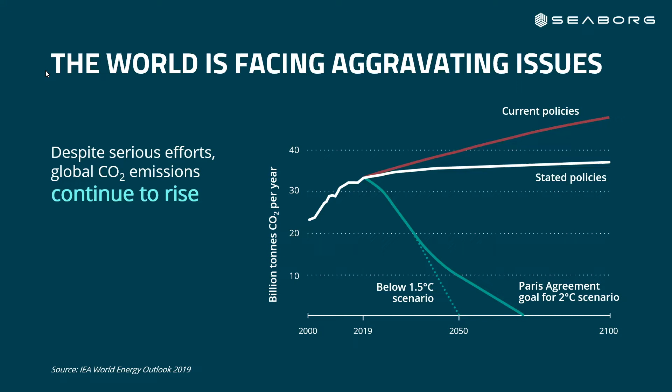So where are we going to solve this problem is the key question. Of course, we want to solve this carbon emission problem across the globe. But our first case here is that we want to take on the Southeast Asian challenge, because carbon emission is historically linked with socioeconomic development, the ways people live. And a lot of economic development happens in Southeast Asia. This region is a rapidly growing economy, but they don't have the climate or the geography to suit the deployment of wind and solar power. And they also have very limited geothermal and hydropower development.

So they want to develop, they want energy. What do they do? They start building a lot of coal power plants. They have around 300 plants to build in the coming decades. And it's really not a very good outlook for the climate. However, they also have a huge population density. If you combine all the Southeast Asian population, it's around 700 million. So it's a considerable problem to give them clean energy and affordable energy, because it's a rapidly growing economy. And that's what we want to solve.

So our vision is to transform the energy markets by deploying clean and cheap energy technologies. And it's not a straightforward task, because most of the time we talk about clean energy in the West, but cheap energy in the East. However, we need both: clean energy for the climate and cheap energy for sustaining the growing economy. Our main mission is to deploy clean energy technologies at a rapid scale, using conventional proven technologies for commissioning and manufacturing, so that it will reduce the cost eventually. Like Vincent suggested before, that's how you achieve economies of scale, because when you deploy a product rapidly, the cost of construction and manufacturing goes down. So that's one of our major goals.

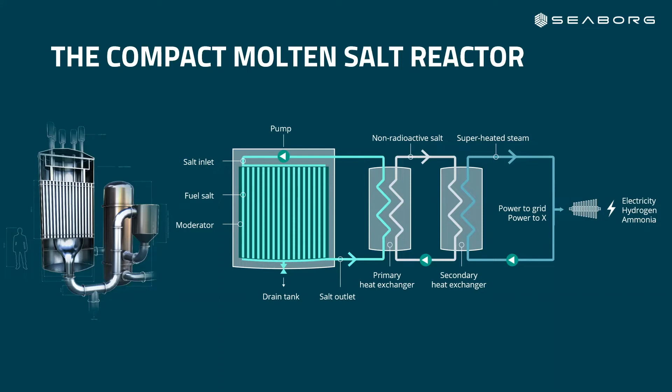So that's the major core, that from a nuclear standpoint, we are using a new type of fuel. And there is a little caveat here, because I will not say anything about the moderator for now, because that's where our real IP lies. And that's what will also explain the compactness. But with that said, this is one CMSR setup. From now on, I will just address compact molten salt reactor as CMSR. And how does this fit in an offshore maritime vessel?

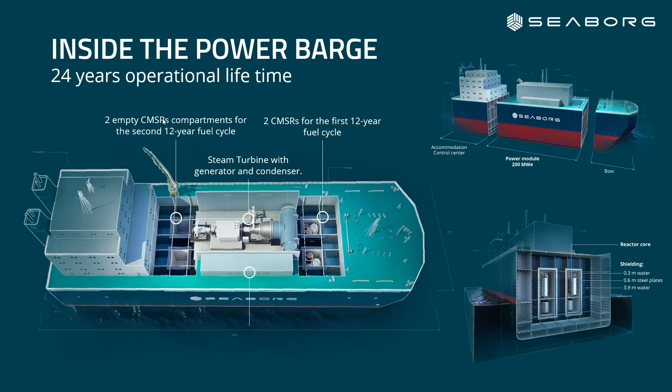So as you can see here, each module can supply up to 200 megawatt electrical. So what is the scale-up ratio here? Our aim is to have this modularized design, so we can deploy up to 4 modules in one batch at a given point of time. So 4 modules, 200 each, maximum 800 megawatt electrical output. And since these are floating and you can tow them, you can construct and manufacture them at a shipyard and deploy them wherever you want.

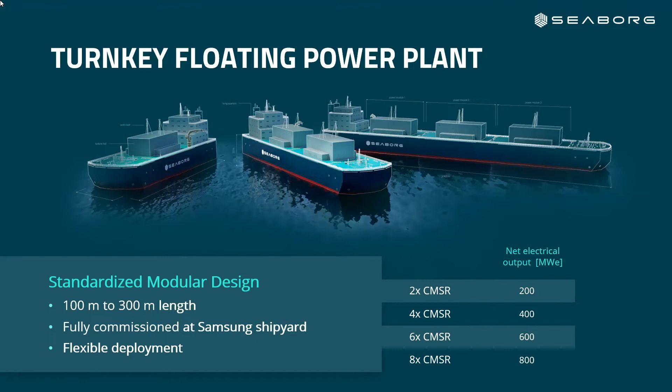And thus you have flexible deployment based on which market you're addressing and where the client wants you to put your power barge. Flexible deployment also helps us during decommissioning, because we can tow it back to a decommissioning facility where we can have centralized decommissioning and waste management at a separate place from where the barge was operating. And it's a very big game changer in terms of site rehabilitation in nuclear.

So, talking about game changers, what are we trying to achieve here? We are not using the conventional nuclear fuel. We are using liquid fuel. That in itself is putting us into an advanced reactor spectrum, where we have to demonstrate a lot of things from the safety point of view, but at the same time from the supply chain point of view.

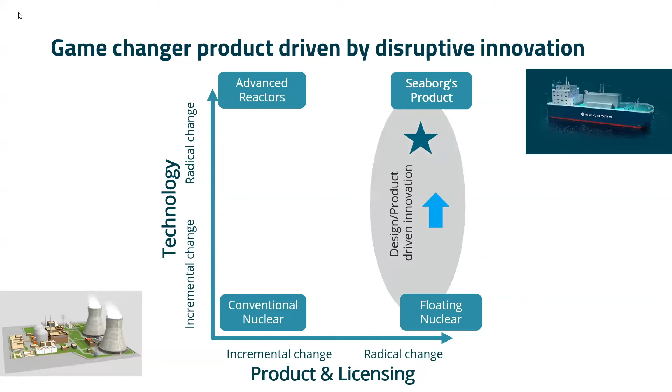There are a lot of other projects from Russia, or even from Turkey, and other players, I think also Core Power from the UK, who are focusing on floating nuclear reactors, and it requires a different licensing strategy, different thinking from a licensing perspective, because you're not just going to deal with the national nuclear regulators, but also with the International Maritime Organization.

So in that sense, we are already doing immense work in having good stakeholder engagement, both from maritime, and we are currently involved with a lot of regulators to see how we can fit it. That's how we want to deliver the product, because a proper standardized licensing enables mass deployment. Not just having technology to mass deploy will help us, but we should have the license to operate it, the license to manufacture it. And that's where these parts come in.

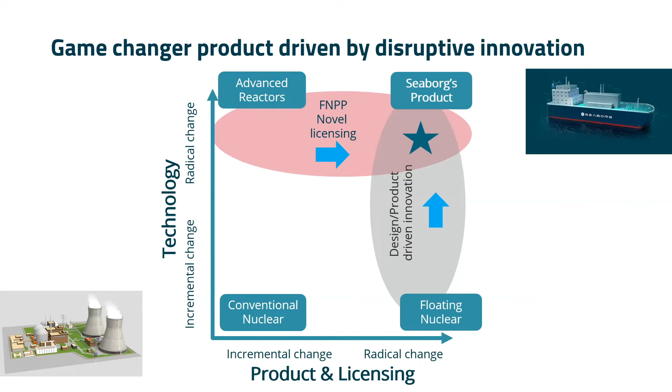So now going back a little bit into science, and this is where I will also talk about the moderator part, where we have the IP. First, why are we using molten salt reactors? Because these reactors can operate at much lower pressure, close to atmospheric pressure. So you don't need big containments similar to conventional nuclear, but more than that, the salt itself can retain radionuclides. A lot of experiments and research are going in to validate and verify these claims, but that's what they explored back in the 60s.

And when I say retain radionuclides, imagine if there is a severe accident and the salt spills out to the land, what will happen? It will just freeze out there. It will not emit any gas. So technically you can just go and clean it up. Of course, you would need some personal protection shielding, but it's not going to contaminate the entire space because all the radionuclides are going to be retained in the salt matrix.

The second one is that molten salt reactors enable us to operate for a longer lifetime. It reduces our refueling timelines, which increases the availability and capacity factor with which we can supply power. And our other goal is to use the molten salts to have flexible reprocessing so that we can reuse the uranium from spent nuclear fuel far more effectively in our future CMSR power projects.

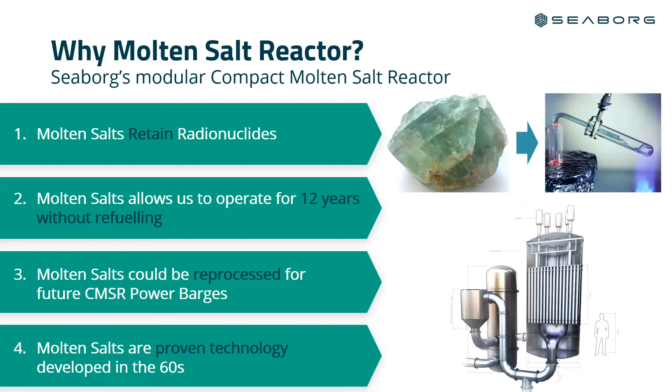And finally, of course, we can't start from zero, because molten salt reactors have already been experimented with and researched in the 1960s at Oak Ridge National Lab. So we take them as an inspiration, but we don't copy them completely. That's where our moderator comes in. The issue with the moderator: we want to operate molten salt reactors for a longer lifetime.

However, the experiences from the MSRE experiments show that they normally use graphite as a moderator in molten salts, because you cannot use water like conventional nuclear, since water reacts so badly with high temperature salt and it's unpredictable. What happened is that graphite expands and contracts because of radiation, and it also degrades over time due to some chemical properties. So you would have a much shorter lifetime, around 6 to 7 years.

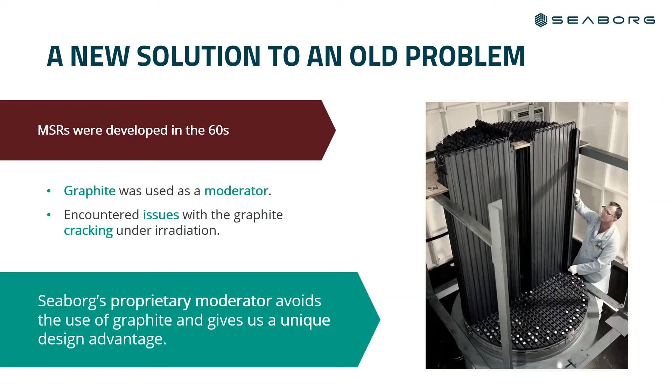To avoid that, Seaborg researched multiple other options from a neutronics perspective and thermohydraulics perspective, and they figured out they want to use sodium hydroxide. That's where our core IP is, and we are going to use sodium hydroxide. It's just a common salt. We can't even call it a salt. It will look like pellets, which people normally use in day-to-day life. However, it is very highly corrosive. It has excellent neutronic properties.

And that's why we can have a very, very compact core, where we get the terminology compact molten salt reactor. So the core itself gets compacted because sodium hydroxide has excellent neutron moderation properties. However, it's super corrosive. And until that point of time, there hasn't been a lot of people looking into sodium hydroxide, especially using it at high temperature. So we were the ones, we thought, okay, neutronics is good. Let's think about chemistry.

We didn't have much data, so we need to deploy a lot of R&D to figure out whether it's possible. And in Seaborg, we have a culture where we like to kill ideas. You have a lot of ideas and you try to kill that idea. And if you can't kill that idea, that's where you have to go. And that's how sodium hydroxide is still prevailing, because a lot of thought process went into killing it, but eventually we couldn't kill it, and we found a way to control it and mitigate corrosion. And that's one of the main reasons why we can also have a longer lifetime, up to 12 years.

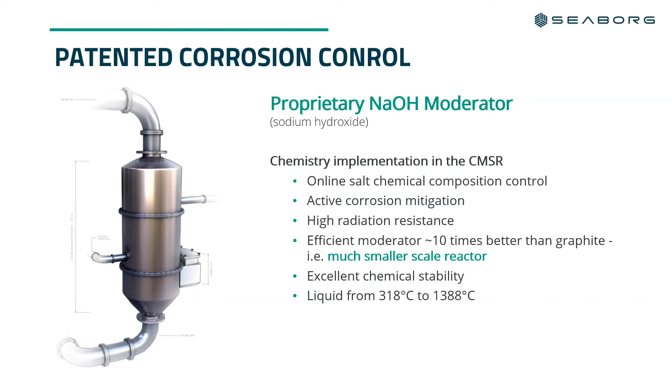So going back into some timelines, I have talked about there's a need for changing the licensing approach, and we are working with stakeholders. So currently, we still proceed with ABS, the American Bureau of Shipping, and the new technology qualification process, where we finished the feasibility. So by the end of this year, we'll be submitting a lot of documentation for the concept and verification stage, and you'll get some good news next year on us going through the upcoming phases.

At the same time, we'll also engage with nuclear regulators to see how we can align the IMO standards for maritime and nuclear regulatory standards. And the timeline going forward is that we want to deploy the first reactor between 2026 and 2028 and supply power; not just manufacturing and commissioning, but also supplying power is quite important. And then by 2028 to 2030, we want to get something called a type approval.

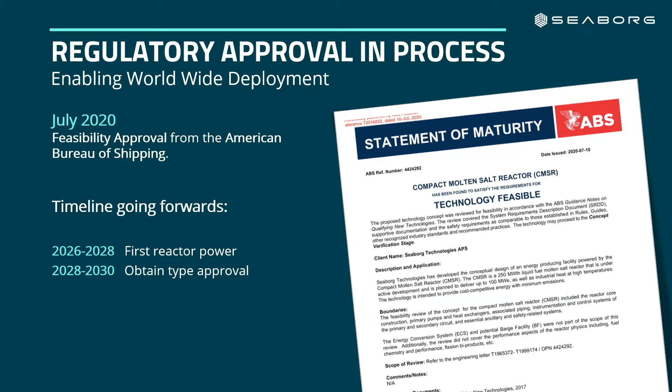Type approval in maritime means that you don't have to get approval for each and every single vessel you are manufacturing at the shipyard. So if the CMSR power barge gets a type approval, you can go and mass produce, and you don't have to go through the entire licensing process from top to bottom every single time you're manufacturing and commissioning your nuclear reactor. So that's a very important step for us in the right direction, and IMO actually helps us to achieve it. But we also have to do this in line with nuclear regulators.

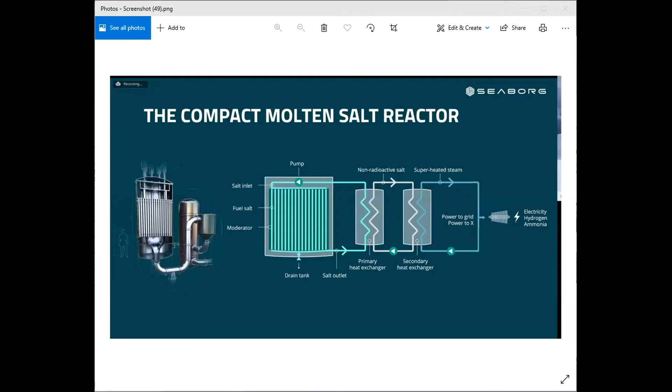Awesome. I had a question, Hannah here. Yes, Hannah. I've seen a floating nuclear power plant, I think at the early concept stage, that was a charging station for electric yachts. Is there going to be electrical freight shipping that needs to be recharged at various points throughout the seas, where this barge could be a charging port for ongoing travel?

I don't think that's the goal, because if you want charging ports for transportation in the maritime sector, for electric powered ships, that's a completely different case, because you want the stations in the middle of the ocean, where a lot of things are unpredictable. But we don't want that. We want something more tangible, an environment which we can control. Even though it's offshore, we're going to make sure we have some backwaters, so we can control the environment.

So it's not intended for that purpose. It's not intended for out at sea. That's a very different scenario. Yeah. Okay. Cool. Thanks, Vighnesh.